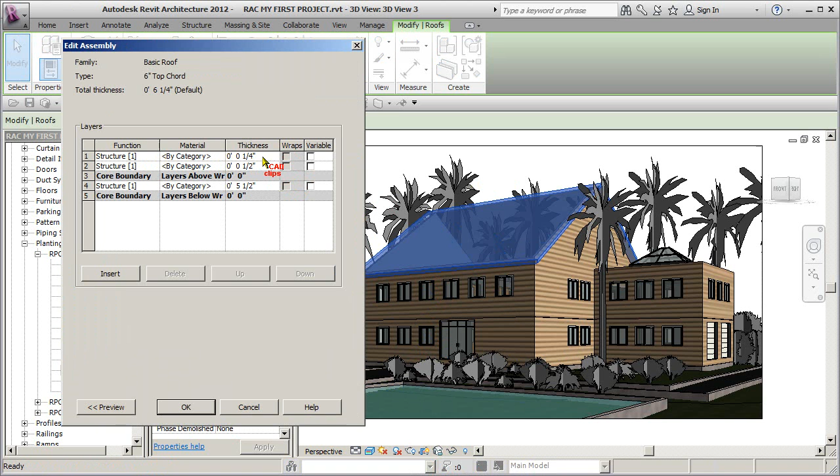The next thing I want to do, I forgot to do my roof. In my perspective view, I'm going to pick on my roof, go into edit type, click on here and look at that, top material is there, but it hasn't been provided. So we'll pick on our material.

We're all set up to do this. Go to material, go down and see if we have something called roof shingles or shakes here. Let's see. Roofing, shingles, wood shakes. Perfect. Nice preview, looks good.

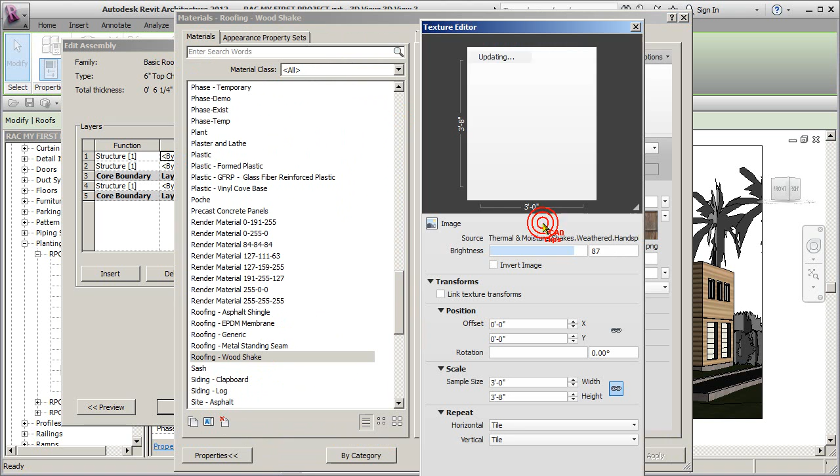If you pick on this picture and you want to change the size and scale of it, you can say you want bigger shingles or modify the size of the pattern on the render. You can go in and change this and either lock or unlock the proportions, which is really nice. So you can change the size of that stuff.

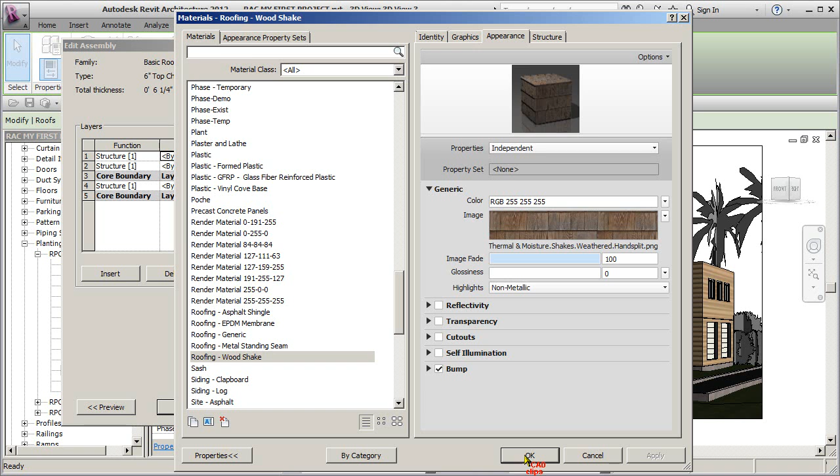So I've changed my roof to be wood shakes, hit OK and OK. Now I'm getting this nice effect in here because I'm set to be realistic.

If I go back to just hidden line, I'm going to see this. If I change this to say shaded, it's going to look like this. If I change it to be realistic, realistic actually tries to inherit the rendered view, which is why I'm getting kind of the log effect.

Okay, time to render. We pick our teapot render here. Quality, well, I'm going to go best right off the bat. You know what, the first one, let's go draft just to get a little bit.

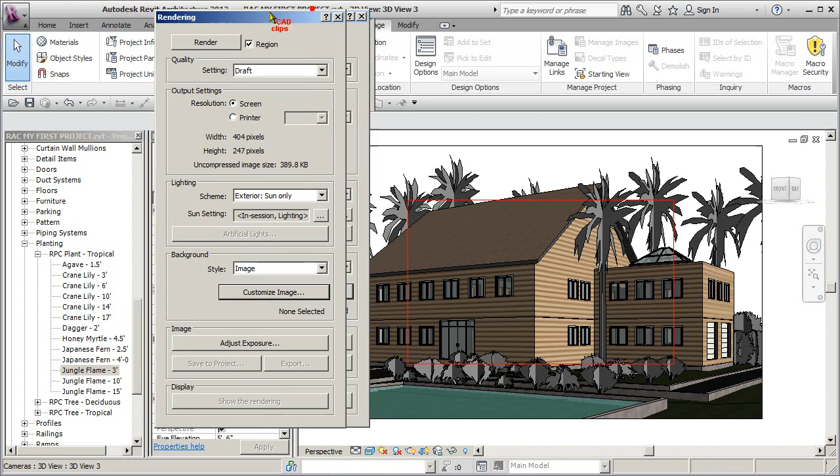You can also say regional, and then you can take this red box here that just got turned on and you can do a little regional rendering. You don't have to render the whole thing because it takes time. I'm going to take that off though.

Lighting, exterior, it's critical that if you're outside you say exterior and if you're inside you say interior. I'm not going to go into much more detail than that.

The background, I can say sky, cloudy. Revit's going to plug in a default sky. I'm going to actually pick the image option here, and then browse, and I've got a couple images here. Let me switch my view to be thumbnails. Okay, I've got a blue sky and a gold one. Let's go with the gold.

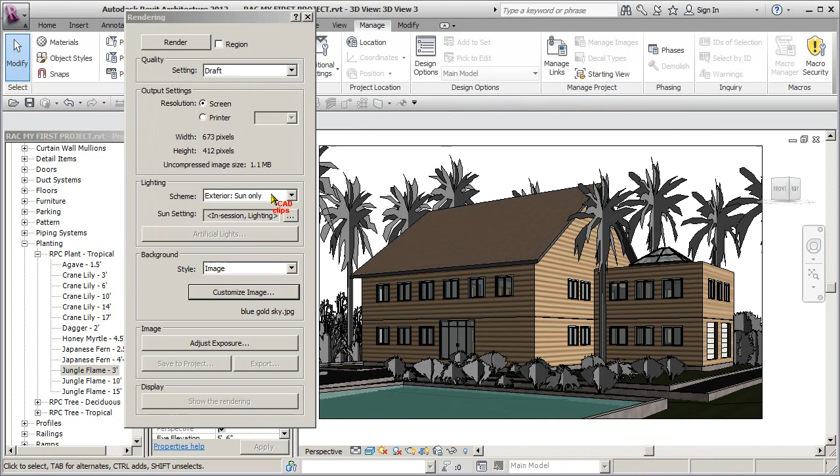Hit OK. I'm going to say stretch it, it's going to stretch that across. Hit OK. So here we go. Draft, exterior, image, everything's ready. We say render. So it starts to render, and this should not take too long.

Not too bad. First of all, you're noticing the water is really ripply because I cranked up the waves on that, so I'm going to turn that back down. I'm not crazy about the sky, I'm going to change it to blue, and we can also go in and adjust exposures and stuff. So that's just kind of a first round at it.

I'm just going to hit exit, I'm not even going to save it. If you like what you see, you can say save to project and it'll save it.

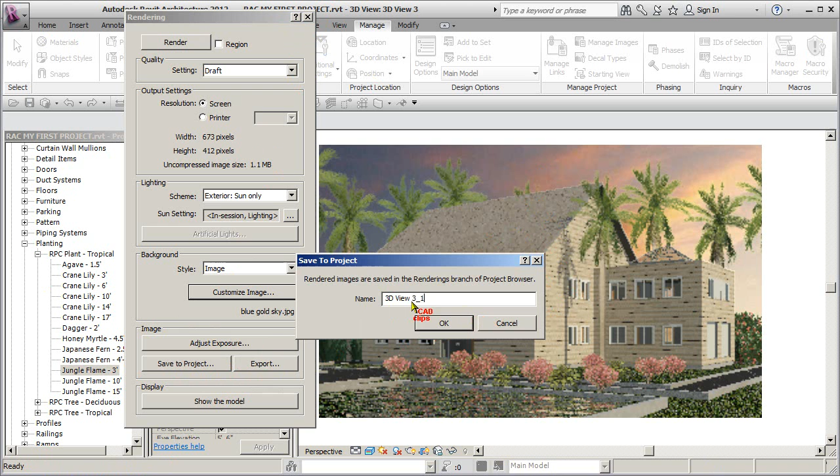Okay, let's even do that. Let's just say save to project. And there's the name, 3D View 3_1. Hit OK, close this off.

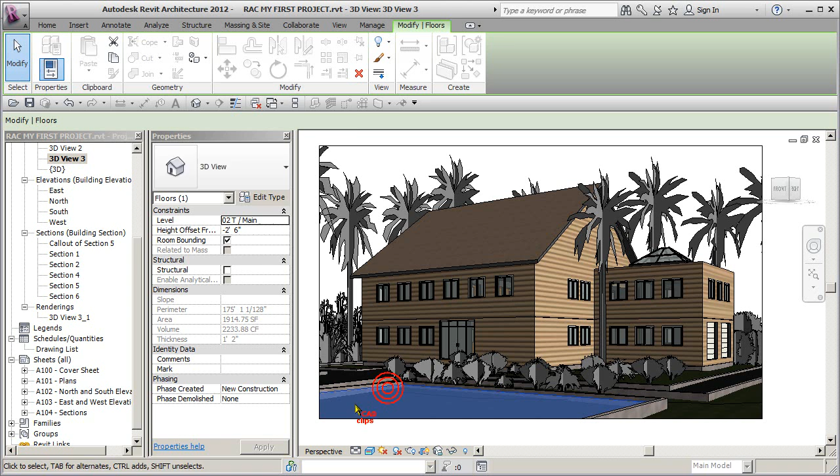Back to my 3D view. First thing I wanted to do is pick on this floor, go into here, edit, go into here, water, material, and I'm going to bring down the waves on that. Way down, not so wavy. Okay, so that's going to help that.

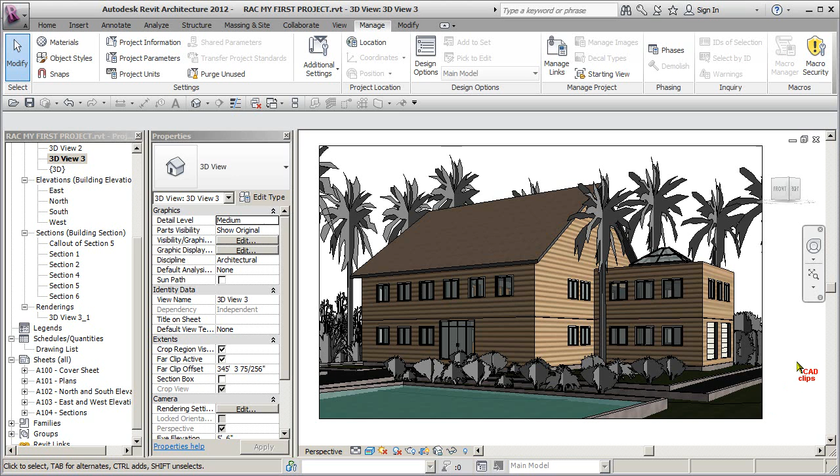The next thing I'm going to do is change my sky background. And I think that's it. I just need to turn up my quality of rendering. So I would probably do a save now.

Back to my rendering, okay, let's go medium detail. Exterior sun is good. Image, we're going to switch our image. We're going to go here, and I'm going to pick the blue sky instead.

That'll be better. Okay, now I don't have to stretch it, I can just go across the width or original size, but then I'm not going to get the effect. You generally have to stretch it. So hit OK. We're not going to see a lot of this bottom cloud anyway.

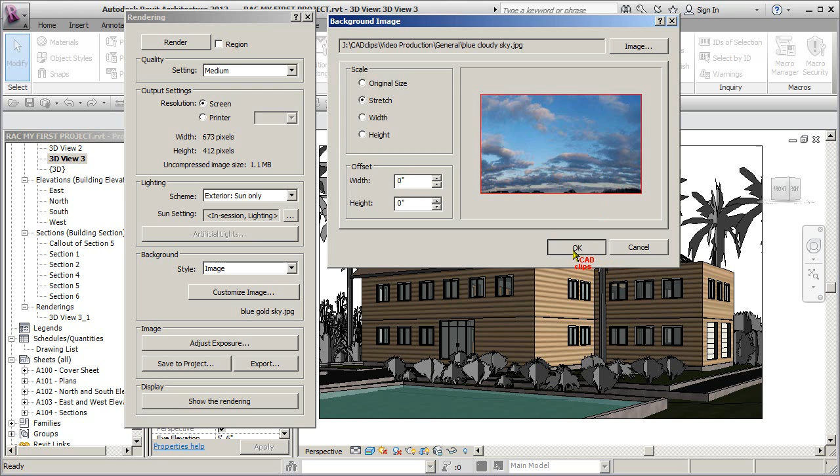And that's about it. Let's render it. Here we go. And there we go, that's not too bad.

The problem with putting in the full sky background is you end up seeing sky too low and it kind of throws you off. You're almost better off with more of an actual background. If it's 100% sky, it's kind of tricky, like it's out there in the middle of nowhere.

My pond turned out well. Everything is looking good. I need to take these trees and shrubs and drop them down, they're all kind of sticking up like little lollipops there.

So I would bring these guys down and I'm going to go search for another background image. I'm also going to darken up the log material, I'm going to show you how to do that. So we're making a list: darken up the log material.

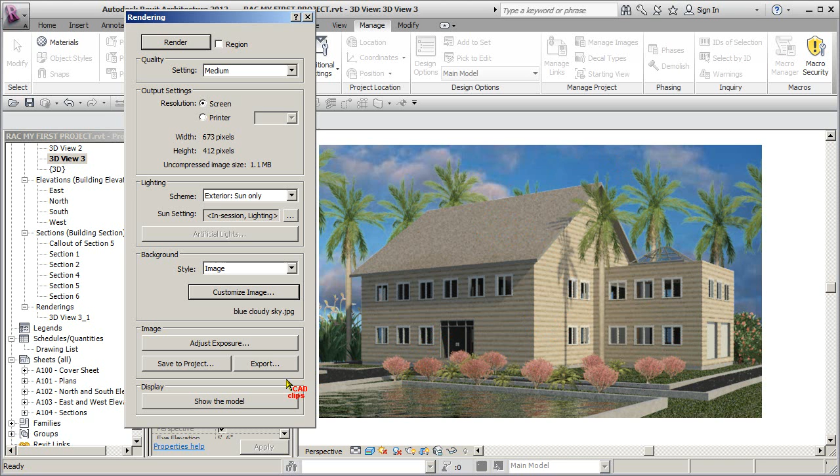Let's darken up the shingles. Let's change our backdrop and drop down our shrubs and then do another render. So we'll come back and do that in our next lesson, and we'll also talk about adjusting the exposure, etc.

Let's do another save, sure, why not. Save it, okay, exit. So now we can go to our renderings. We have our first rendering here, we have our second rendering here. Not too bad.